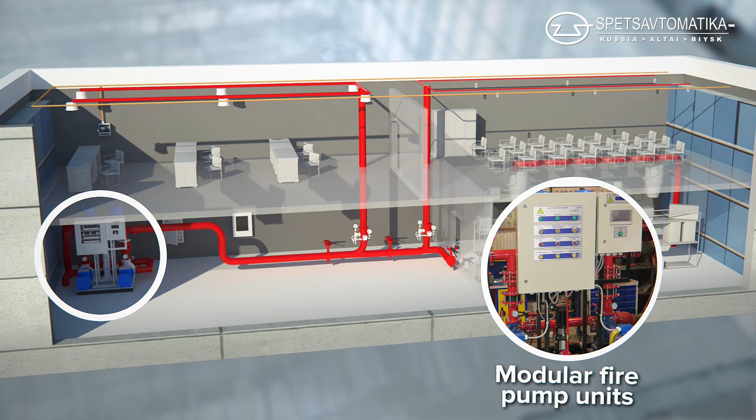Spetsavtomatika, Biysk city, is the only Russian company manufacturing a wide range of equipment for water and foam fire extinguishing systems and fire alarm systems. The product list is over 1,000 items: spray nozzles, control units and modular fire pump units, signaling and control detectors, annunciators and detectors including aspirating detectors, and integrated and automatic fire extinguishing systems.

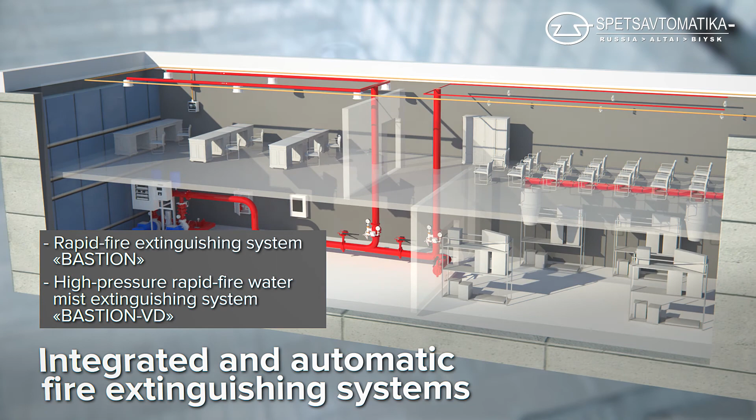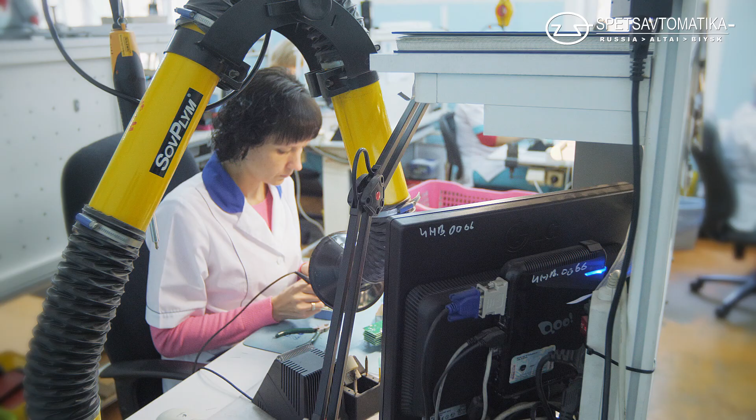Spetsavtomatika knows what reliability means, because it has been providing fire protection for more than 45 years, equipping objects with complex systems of automatic fire extinguishing, from development and production to engineering and installation.

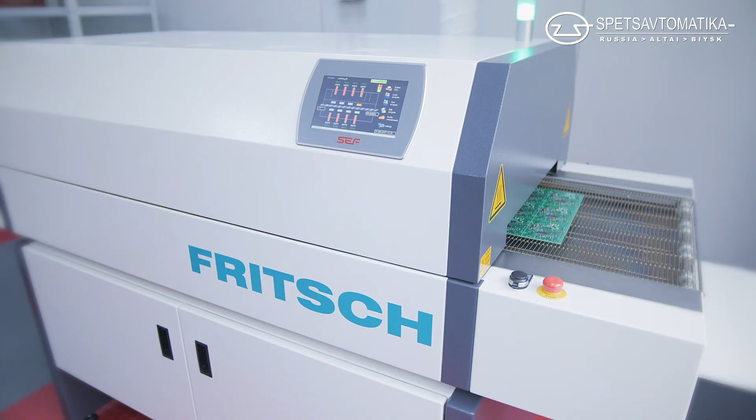Today, Spetsavtomatika is part of the Scientific and Production Association, which is located in one of the largest science cities in Russia, Biysk city. The company annually introduces new products and systems on the market.

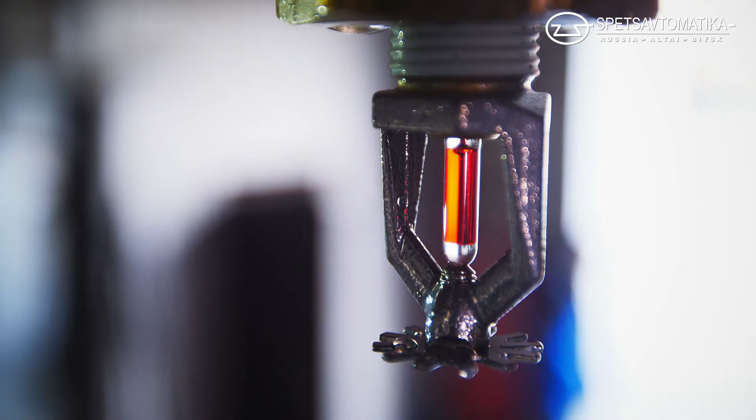Many developments have no analogues in the world. Most of them are protected by patents. Today, Spetsavtomatika is the owner of more than 80 documents for intellectual property. The products developed and produced at the company annually receive high objective assessment from experts at international specialized exhibitions.

There is no sphere of activity whose objects are not protected by the equipment of Spetsavtomatika. There are objects of civil and social purpose, objects of the defense industry and oil and gas sector, objects of food and chemical industry, objects of aviation infrastructure and energy industry, objects of housing and communal services and agriculture.

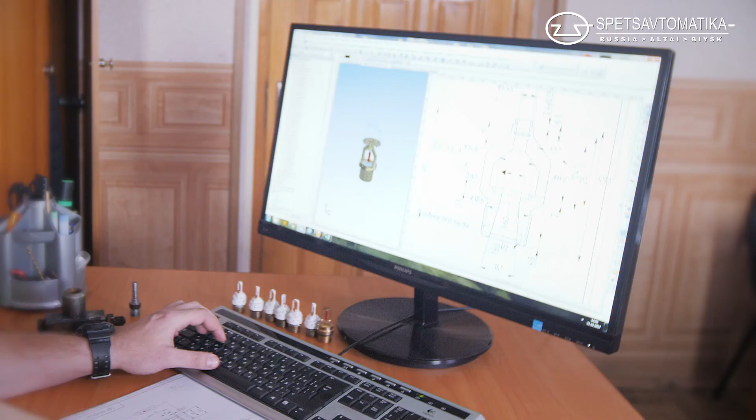The focus for all new developments in the company is the consumer. It is the person who is the source of information and a program for the development of new directions. Release of products with a worldwide name starts with the process of engineering study and has informational support for products at all stages of the life cycle.

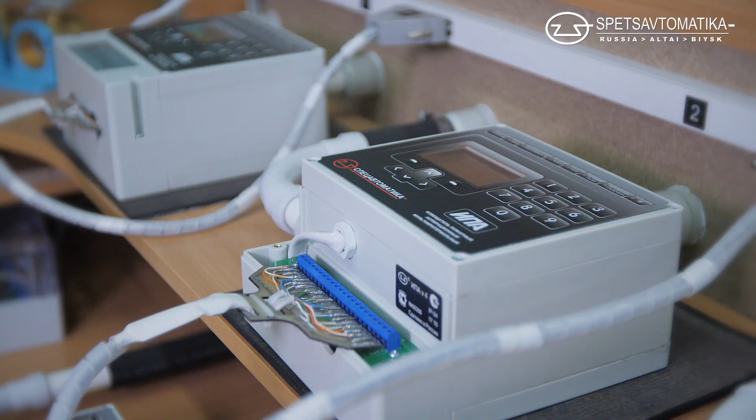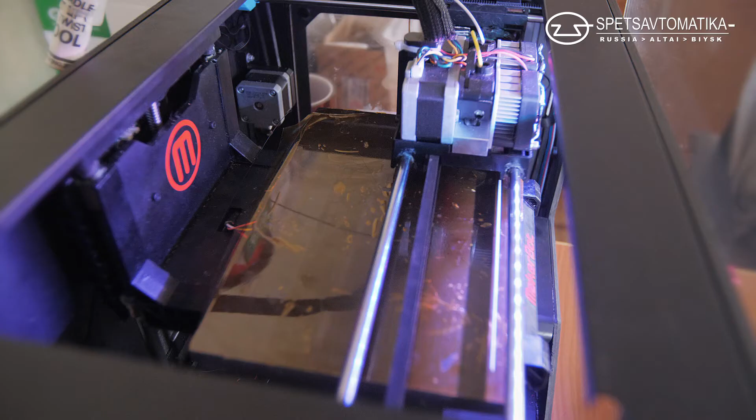Using modeling of combustion processes, the necessary parameters and characteristics of the future product are determined. Functional testing of future models of equipment to optimize engineering decisions is done using 3D prototypes.

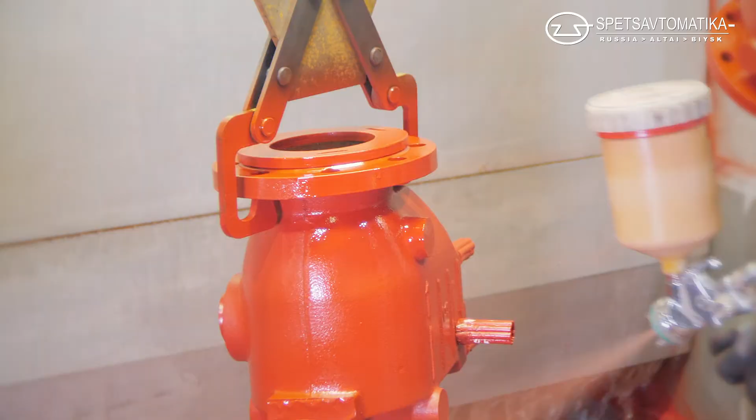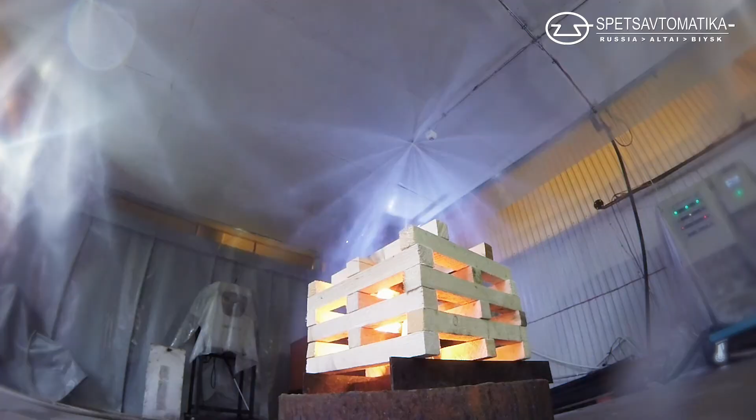Realizing the importance and responsibility of our actions, we impose high demands on all stages of product manufacturing. The testing laboratory allows us to conduct all types of fire tests, with automatic registration of parameters of fire detection and extinguishing. Requirements for both serial production and piece-manufactured products are the same: this is 100% testing of each unit of production.

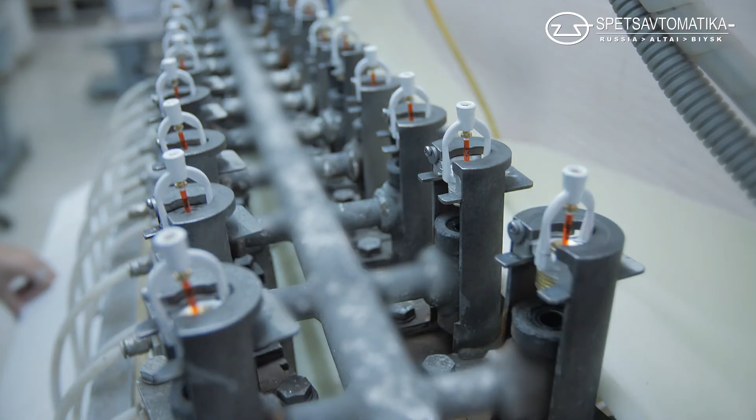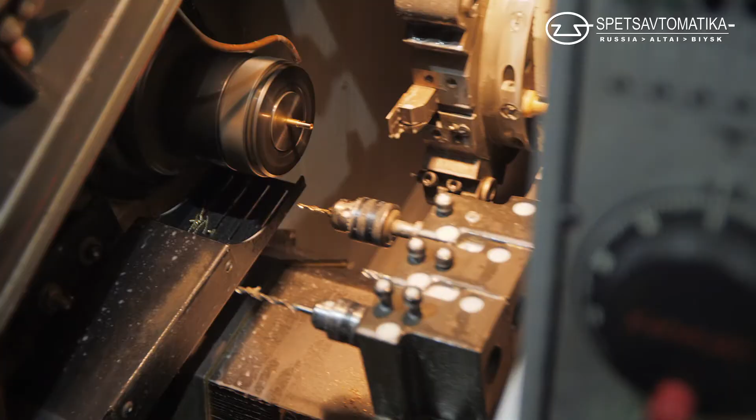The high level of production quality is confirmed by the availability of appropriate certificates, and the quality management system complies with international standards ISO 9000. Constant increase of the level of production is inextricably linked with the introduction of effective systems of technological process automation and teamwork as a unified whole mechanism.

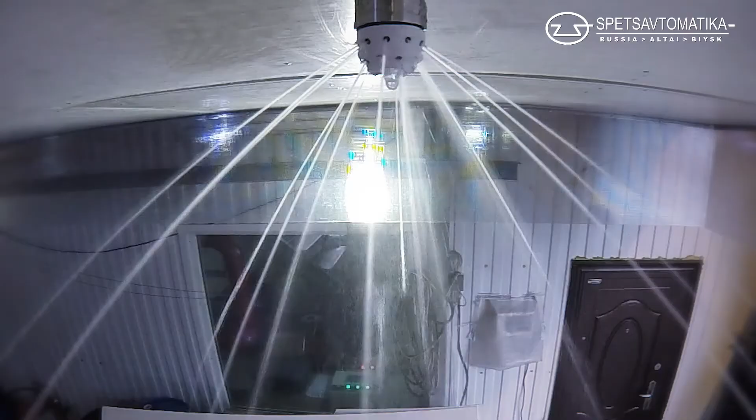The structure of the company consists of 4 engineering and technological departments, a modern testing center, a high-tech production base, an engineering department, a design and installation department, and a network of branches and representative offices in the country and abroad.

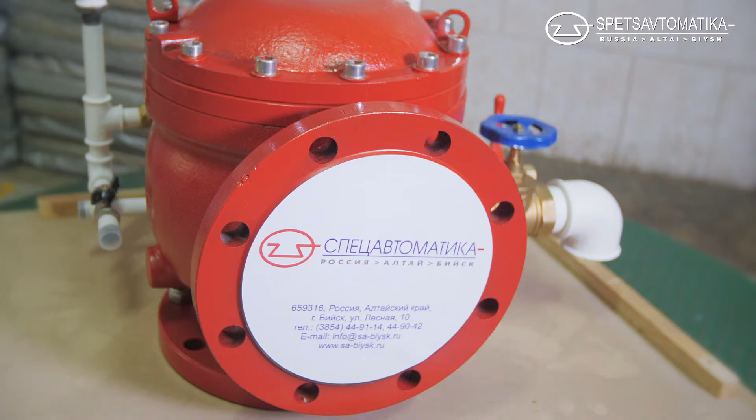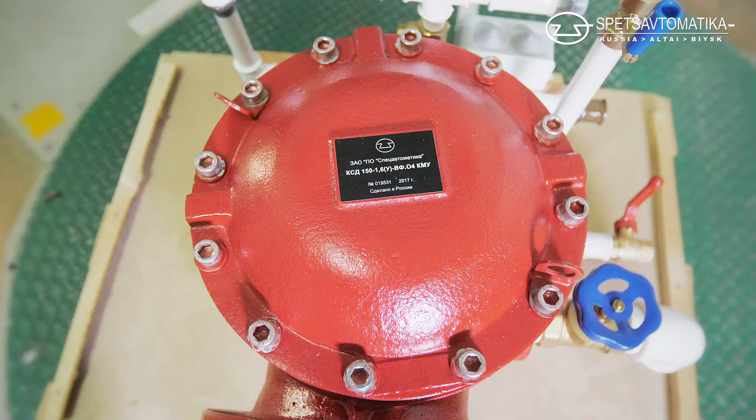Great history, a well-established and authoritative name, and the ability to innovate make it possible to consider the Biysk company Spetsavtomatika the leader in the field of fire safety. The production organization Spetsavtomatika does not stop at what it has achieved today, and every day it searches for new, effective solutions in the fight against fire, because novelty that earns credibility in the present becomes a reliable future.